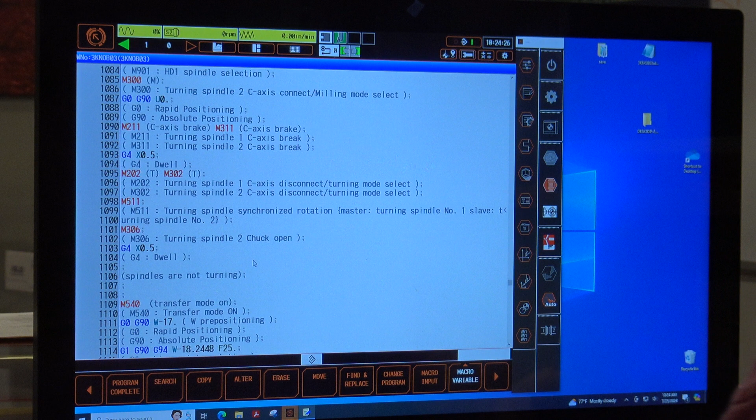Alright, this is a demonstration on how to use the 3D setup for an Integrex. It doesn't matter whether you're using Mazatrol or EIA code. In my case, I'm using EIA code. So you go to that setup screen, then you go to 3D setup.

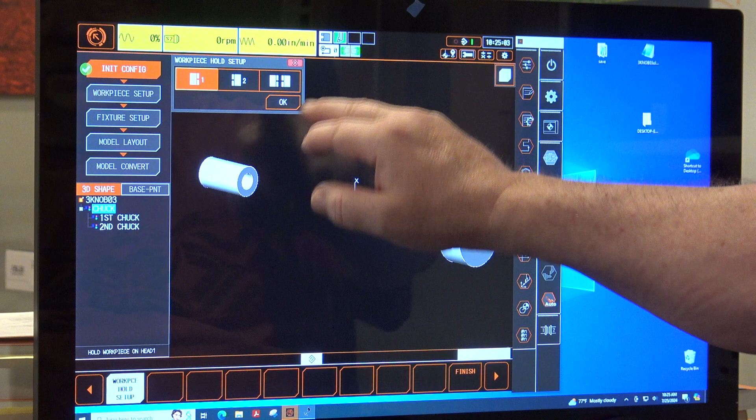You have to fill out these 5 tabs here. The first one is nothing but selecting this workpiece hold setup. I'll just use my finger here so you can see it easier. In my case, I'm using both the main spindle and the sub spindle, so I'm going to click them both and say OK.

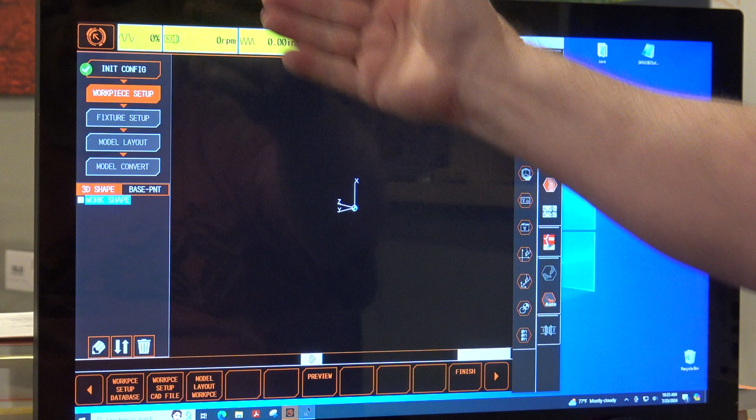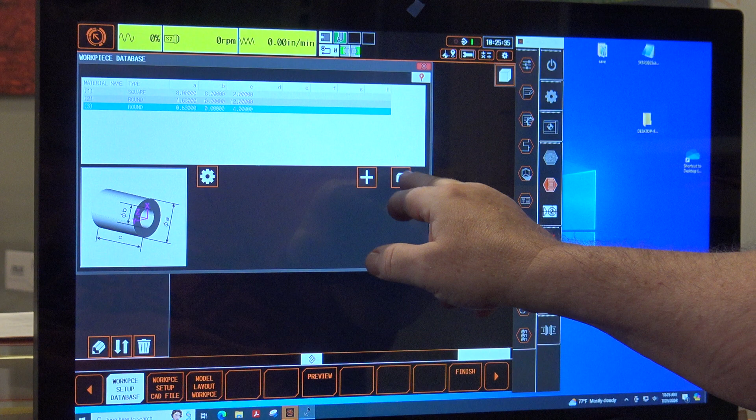You see it moves down to the next one. The second one is workpiece setup. In this case, because it's EIA, I have to have a workpiece defined in my database that I'm going to use, and that is the third one there. It is a 5/8 diameter bar that I made 4 inches long. Select it. Then you need to tell it that you're going to be giving it a reference point that's the face of it, right here.

That'll become obvious here in a second. So then you just say OK, and that workpiece is now set up with the coordinate at the right place. And you say finish. The third step is telling it your fixture, which means your jaws.

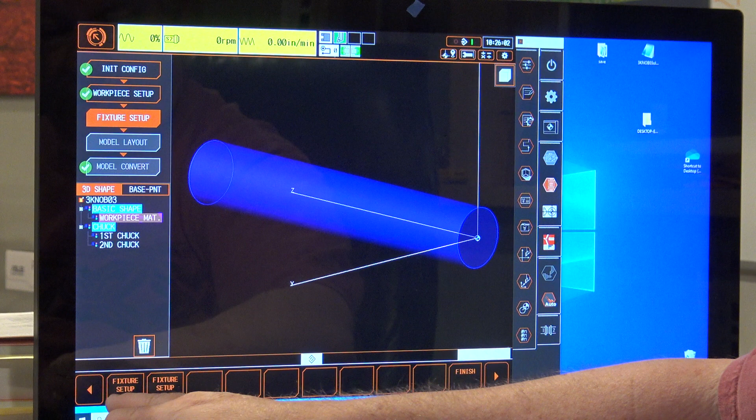So you're going to go to fixture setup database. You need to already have your jaws defined. You do that on another page, not here. That's for the chuck on the main spindle. So I'm going to say that one is going to use these jaws. You can tell that it's set up as a collet chuck, and I use little tiny jaws for the collet chuck.

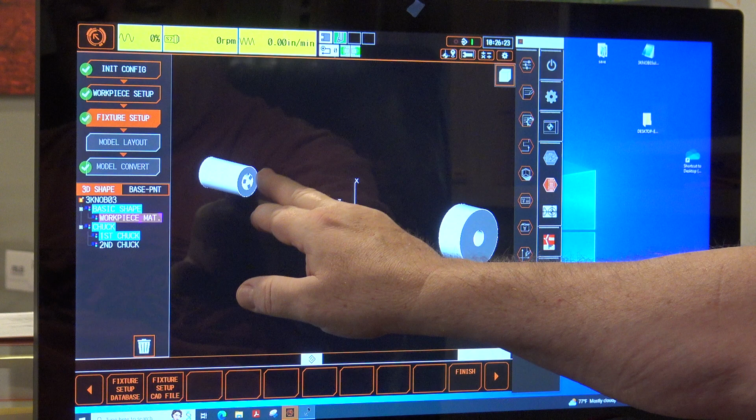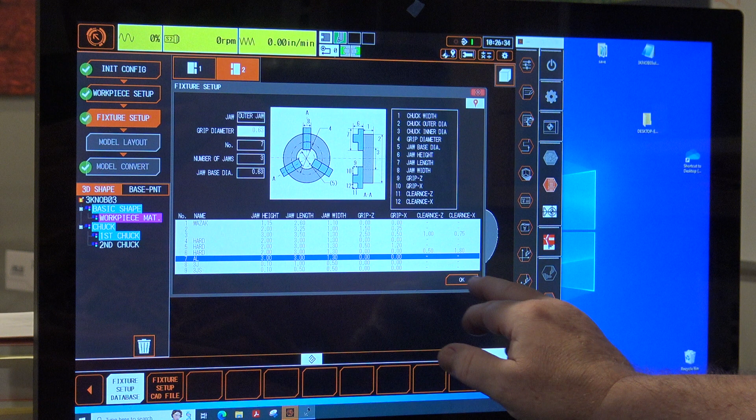Then I'm going to do it again, same tab here, but now I'm going to go to the second spindle, and I'm going to select my aluminum jaws that are 3-inch ones. Say OK, and now you can see the aluminum jaws popped up here. That's the 0 point of the machine. Anyway, I'm done with the third tab now, so I'm going to hit finish, and it'll cycle down to the 4th tab.

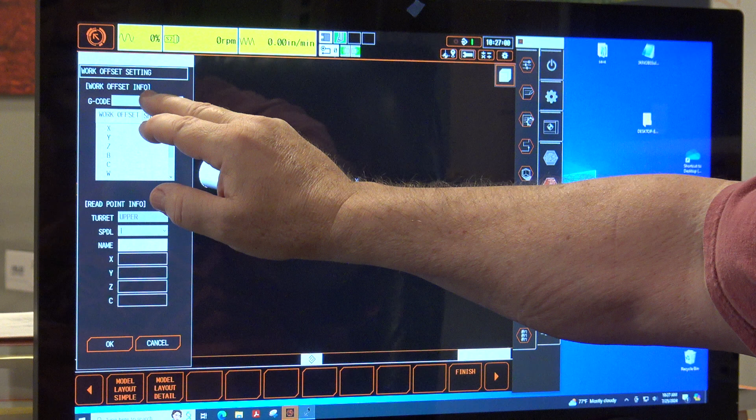On the 4th tab, you're going to want to put in a base point first. You select this button right here. That tells it that you want to put in your work coordinate, work offset. And I'm going to use G54 and say OK. And you see it popped up my G54 right there in front of my main spindle.

If you want to have a work coordinate set up for your sub spindle, or you just want to be able to see in your simulation here if it's right, you can do this again, and this time select G55. OK, and now you can see that it put a work coordinate G55 over here right off the sub spindle.

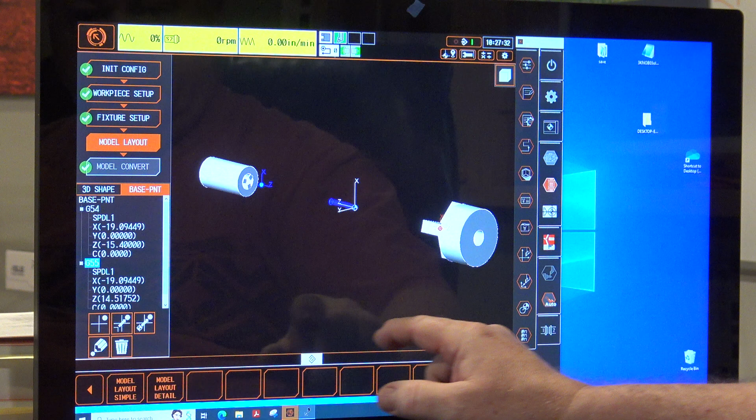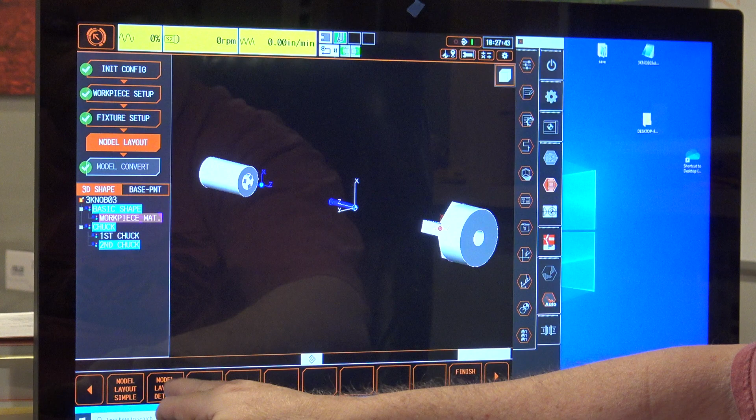Now we need to move this stock over to the G54. To do that, you go to 3D shape here. You go to model layout detail. It always moves the view when you do that. You can use these buttons right here, plane view. You can turn it to the side, or you can just manipulate it with your fingers. You can zoom in here. That's where we need to get to right there.

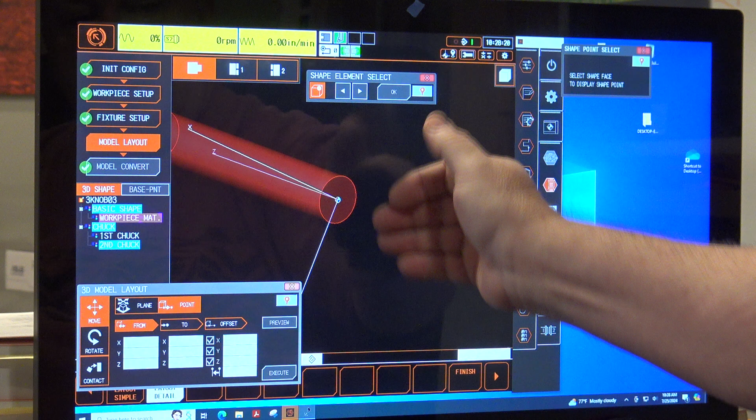So here I'm going to say, well, I want to select. It's asking me with this little dialog box here, what do I want to select? And the only option for selecting stuff right now is a face of the workpiece. So I'm going to just touch this, and it's going to turn that yellow. I'm going to say OK. Now it turns it purple with the dots, and I'm going to select that center dot and say OK again.

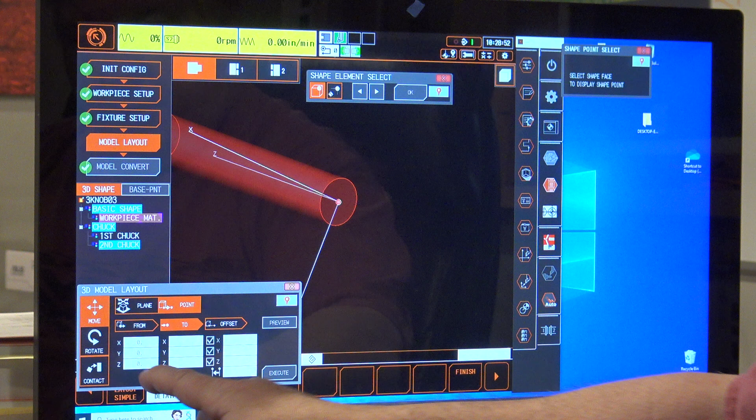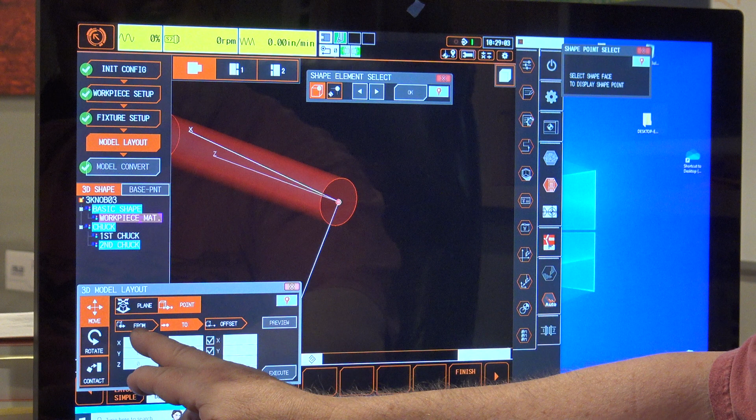What that did was that put these 3 zeros right here. They are the center of that workpiece. Okay, now it wants to move on, so it's moved the highlight from 'from' to 'to', because it already got the 'from' field filled out. On the 'to' field, what you're going to do is you're just going to move this over.

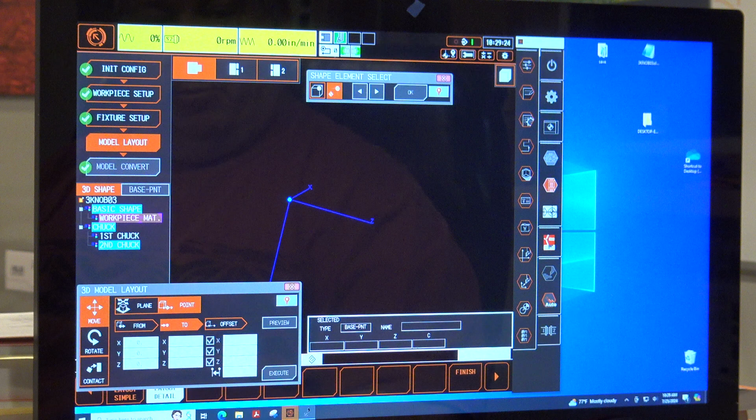Until you get to where you can see, zoom out or whatever you want, so you can see your G54. And you're going to select the second button here, because now we're picking that point. Touch the G54, say OK. What that did was it filled out the second column here with the information that you need, and you can see what the resultant move command is going to do.

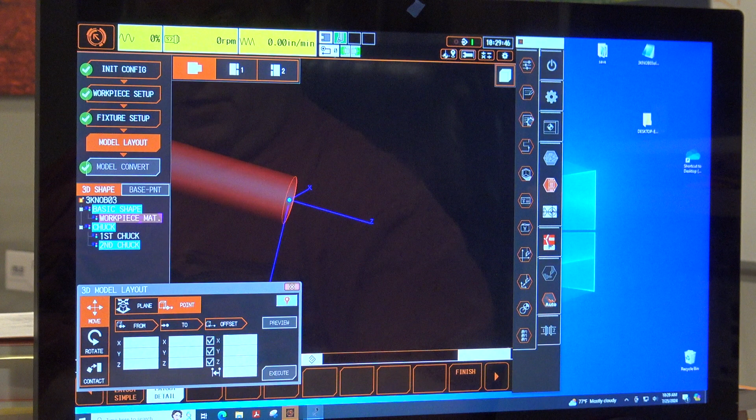You could do a preview of it if you want, and see that it's in the right place, or you can just execute it. Now once you execute it, and you zoom out a little bit, you can see that your workpiece is now in the right place relative to what you had defined as your G54.

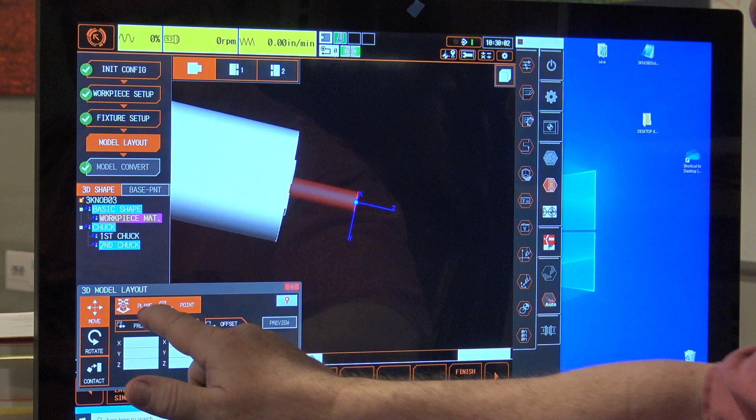Now one more thing you're going to want to do is you want to go back to plane here, and get this thing to give you a view again. Okay, I don't know why it keeps jumping around, it just does.

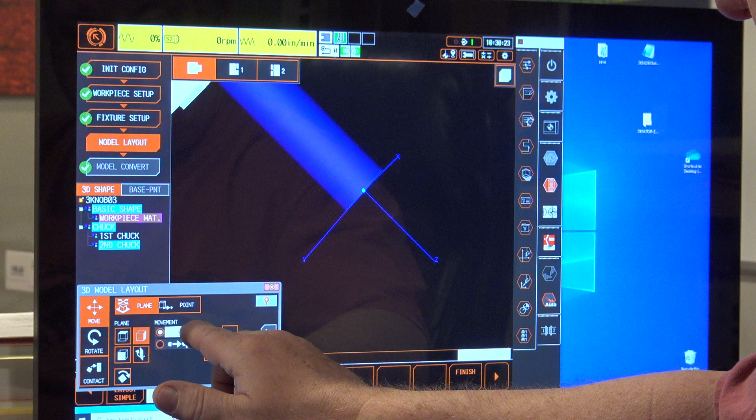So the other thing that you want to do here is you want to move your stock usually beyond your G54, so you have a little bit of metal to cut off, and that's by coming to this movement, typing in, I'll use 25 thou. Okay, that puts the 25 thou in that movement block, and now this button right here to the right, when I touch it, you'll see that this will advance 25 thou. There, that's all I wanted.

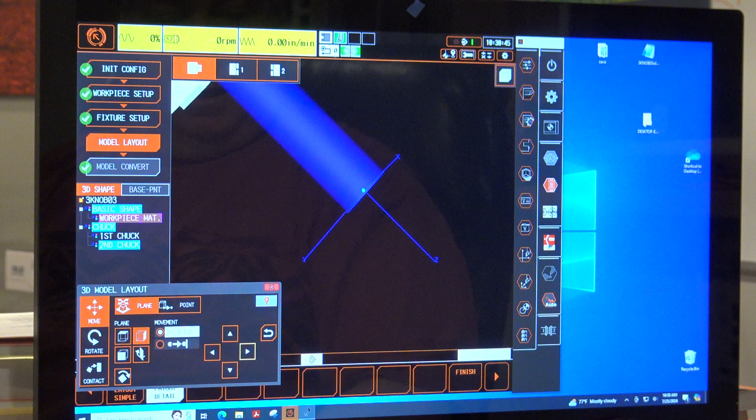And that's it. You're going to close this window, and you click finish. For EIA, you don't do the model convert, and it's done. It does not put a green checkbox for here. I don't know why. If somebody does, please comment down below and let me know why I don't get a green checkbox. But that's pretty much it.

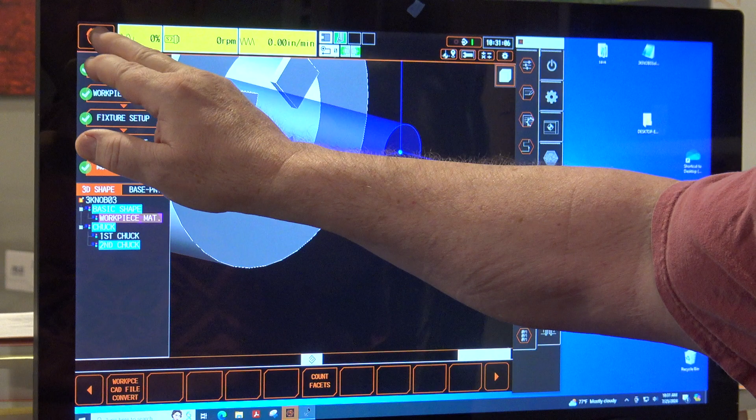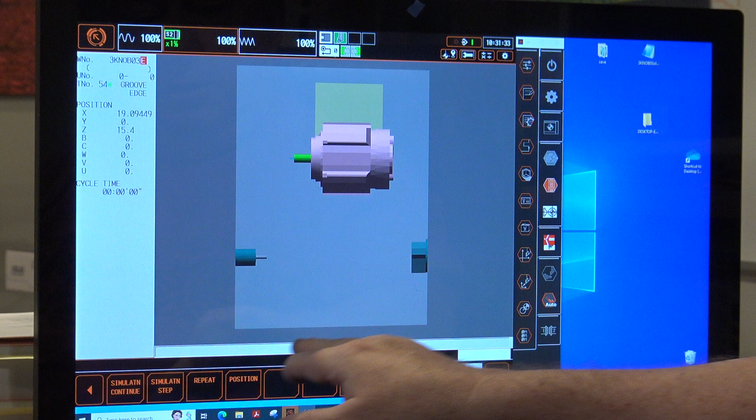Now when I go to program virtual machining, I now see my chuck, my little teeny chuck jaws. They're important because they help you see if the chuck is spinning or not. And then if I go over to machine simulation, I can also see my subspindle jaws right here. And you're now ready to go ahead and start simulating the machining.

And there it goes. Cheers.